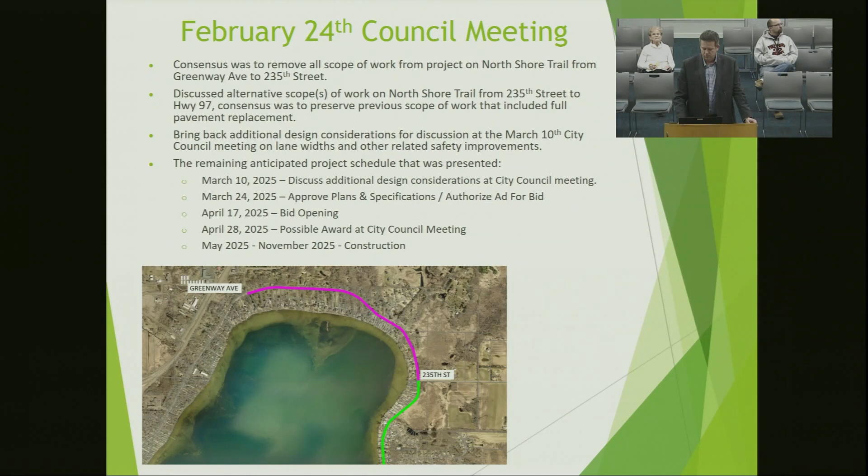So tonight's additional design considerations we'll talk about: lane width considerations, lane striping consideration, and solar-powered speed limit sign considerations. On reference guides that we look at when we are designing roadways or looking at safety features, here's a list of what we generally would look at. Some of them we would use depending on money source, some as a guide, and some are required depending on what you're doing.

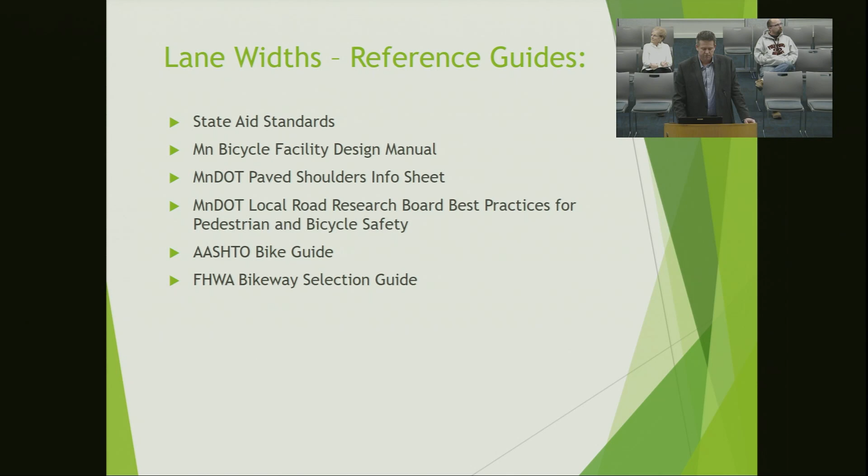Going through those reference standard summaries at a high level—there's pages that go into this, but this is really what we need to take from it.

North Shore Trail is a state aid route, but since we're not using state aid dollars, we don't have to conform to their requirements. However, we're still doing the same scope of work—we're reclaiming it.

Minimum lane width would have to be 10 feet, minimum shoulder width would be 2-foot gravel, and for bike facilities, they recommend following the Minnesota Bicycle Facility Design Manual.

If we were fully reconstructing it, like we plan to with the North Shore Drive portion from Highway 61 to Greenway, these are the minimum standards we'll have to meet on that design: a lane width of minimum 11 feet, minimum shoulder width of 6-foot gravel, and still following the same bicycle facility design manual.

The Minnesota Bicycle Facility Design Manual calls for a minimum 4-foot paved shoulder width, 6 feet preferred. Ideally, provide paved shoulders on both sides of the street.

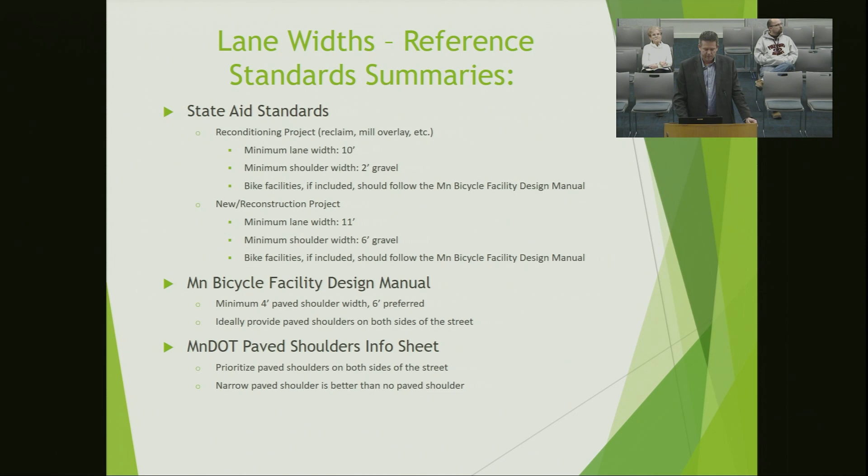MnDOT paved shoulder info sheets prioritize paved shoulders on both sides of the street—narrow paved shoulders are better than no paved shoulders. The MnDOT Local Road Research Board's best practices for pedestrian and bicycle safety recommend providing paved shoulders on both sides of two-way roads to discourage wrong-way riding.

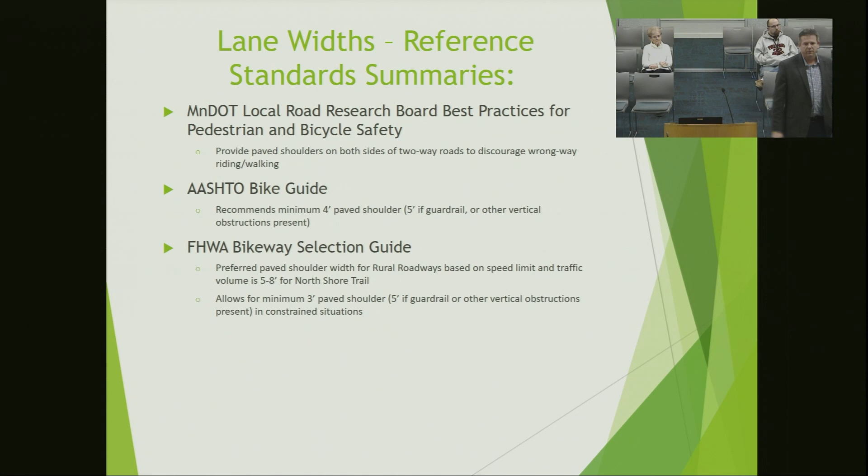The AASHTO Bike Guide recommends a minimum 4-foot paved shoulder, or 5 feet if there's a guardrail or vertical obstacle nearby. For instance, if there's an obstruction there, you're not going to be right up against it—you'll probably stay a foot off. That's what that reference means throughout the presentation.

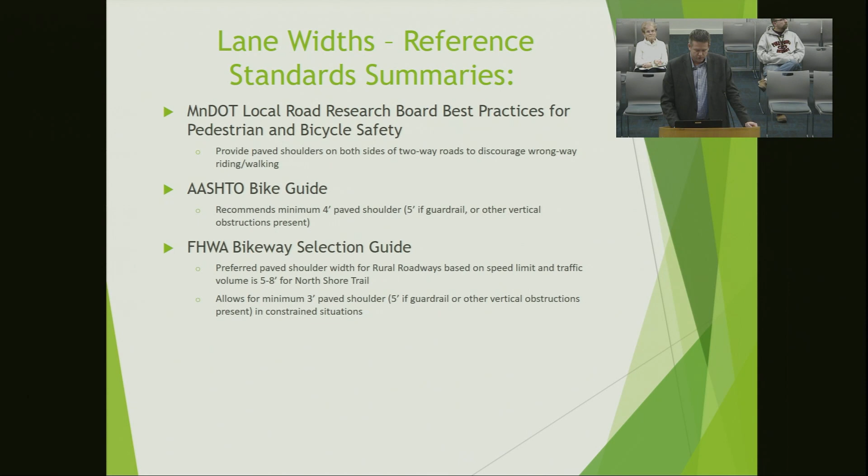The FHWA Bikeway Selection Guide recommends preferred paved shoulder width for rural roadways based on speed limit and traffic volume—5 to 8 feet for North Shore based on the traffic we have there. It allows for a minimum 3-foot paved shoulder, or 5 feet with a guardrail or other vertical obstruction present.

So some of the typical—quick question: what's the current width of the lanes out there? The current road is 30 feet wide at most on average.

There are some pinch points throughout this corridor. Even with new pavement, we're not going to get a full 30 feet in width in some areas where driveways were built close to the roadway. Once you go past the pizza place and the hill on the north side of the road, there's just nowhere to put the road any wider.

So right now it's 30 feet with 12-foot lanes—would that make 3-foot shoulders at best case scenario? All right, thank you.

Well, that leads into the slide—good lead-in. This is the existing section that's out there today: 12-foot striped lanes, 3-foot shoulders.

We just did some pros and cons for each typical section. Obviously there are other opinions that might add an additional pro or con, and that's certainly something we can bring up and discuss.

This proposed design matches the existing crown, meaning the center of the road is the high point and sheds water equally in both directions, at 2.5%, which is our city standard. For new pavement, it's important to have crown to get snow and ice off the road rather than sitting on the pavement. This matches the existing layout.

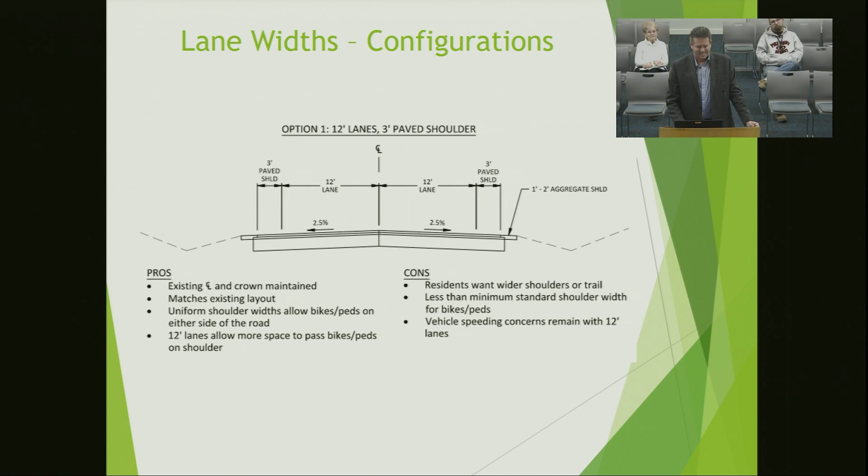Mr. Mayor, if I might interrupt—just so everyone's aware, a 12-foot lane is sort of the standard. About 90% of lanes striped on roadways are 12 feet. So keep that in context; that's the normal lane width.

On higher volume roads, your center turn lane would sometimes get wider than 12 feet. There are design considerations based on traffic and road type. Option 2 would restripe the road down to 11-foot lanes, providing a 4-foot shoulder.

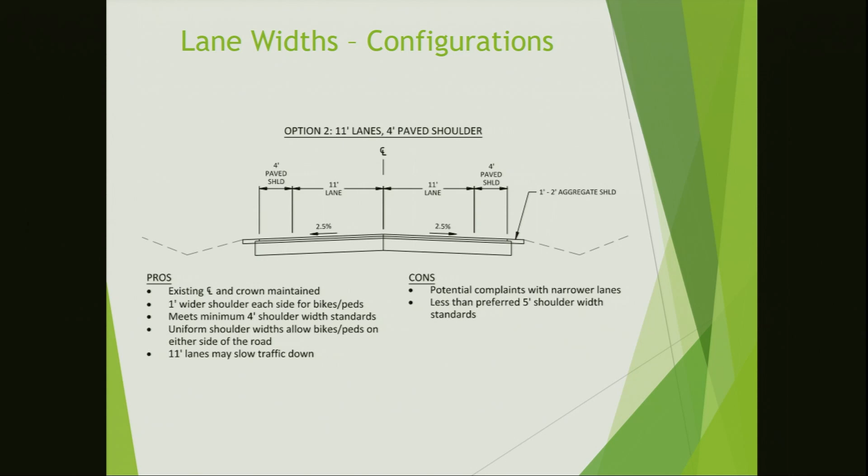Here we would still maintain the center crown. We'd gain 1 foot on each side of the shoulder, meeting minimum 4-foot shoulder width standards. Uniform shoulder width allows bikes and peds on either side of the road, and an 11-foot lane could potentially slow traffic down. Cons: potentially complaints with narrow lanes, less than the preferred 5-foot shoulder width.

So if you look at the 2 railings you guys got on the sides where you walk up and down from your dais there, that's about 4 feet. So if you stand in between, that's what it would feel like out on the road.

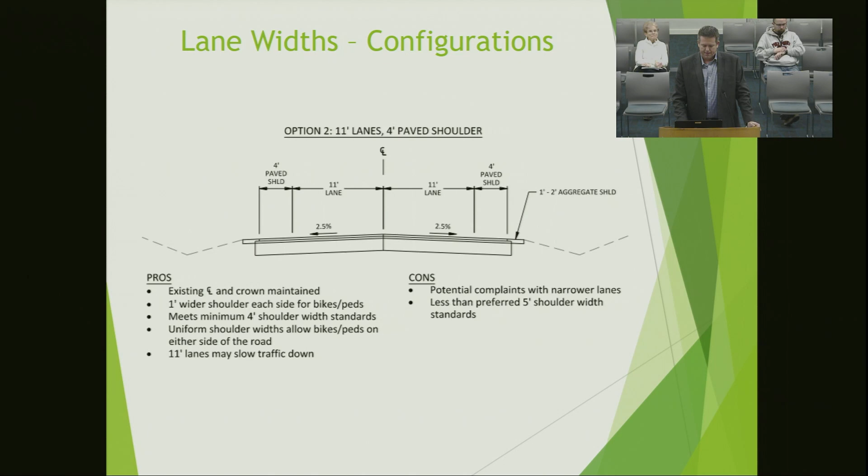Option 3: go down to a 10-foot lane, 5-foot paved shoulders. Existing crown here would stay the same, 2 foot wider on each side of the road. You get that traffic calming effect, and it meets the shoulder widths allowed for bikes and peds on either side. Potential complaints about how narrow this road is.

This would provide some challenges in some locations for garbage trucks, buses, and any larger delivery trucks that do drive down that corridor, to stay within that lane uniformly through wherever they're driving. And if you do have somebody close biking or running, if a car has to swerve 1 foot over to feel comfortable, you potentially are in oncoming traffic too. So the skinnier the lane gets, that's some of the things to think about from a driver's behavior.

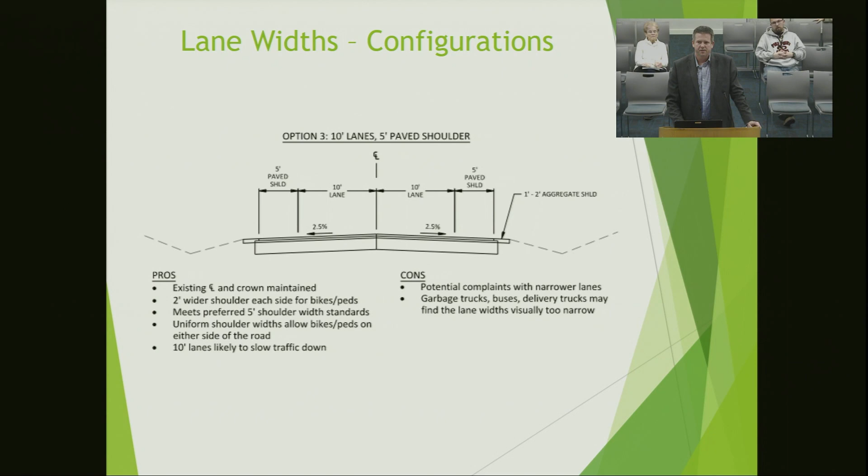Option 4: now we're looking at offsetting the crown of the road, which would require additional shaping, moving the material around with a grader after it's reclaimed in place to shift all that material over.

Some of it might be lost in their bid somewhere, but if you're actually just calculating the cost of the lineal foot of the project, this potentially could be around $70,000 for shifting it 1 foot, with the amount of material that if you calculated it out. But you're gonna be out there grading it anyways, so somebody might bid something a little different, and you don't actually see a price increase once you start playing around with the crown - it's just how they bid the project, because it's gonna be a lineal foot bid or a unit thing they'll have to do in the project regardless, to shape it and compact it before we pave it.

But here you shift the road 1 foot offset, you then have your 11-foot lanes, and you can obtain 3 foot on one side, 5 foot on another.

Notice though that one side of the road is gonna have a flatter crown. So over time, that side is probably going to start developing more pavement issues than the other side, because with the crown you're gonna get the water off the other side a lot better. And as the crown flattens out over time, that's where a lot of your roads start to degrade faster, and that crown starts sinking just over time.

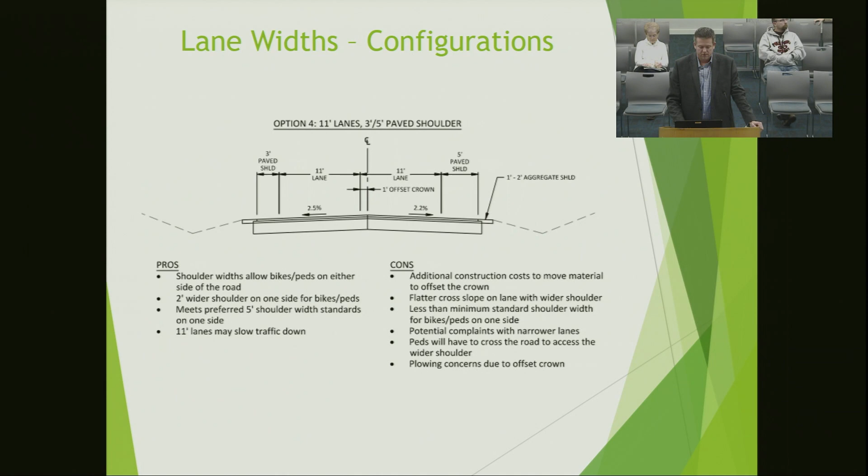Also looked at one roadway if you had a 2-foot offset and went down to a 2-foot paved shoulder on one side and 6 foot on the other, while maintaining the 11-foot lanes. Obviously you get that one side that exceeds the 5 feet.

You get a flatter slope, now you're less than 2%, and in terms of constructability of the work out there, unfortunately sometimes you're not just gonna even hit that 1.9, you'll be flatter than that. So that's why we set the city standard at 2.5 on new paved roads. So when you take into account the construction tolerance of a project, you might end up with a road that's just a little over 2% when it's all said and done in some spots.

If they're trying to match into existing curb, where lots of times we are, or they've got other obstacles to work around - utility boxes in the road or manholes and stuff like that - but with this, when you get a shoulder that wide out in this area, we know pretty well you might start inviting parking in that area. That's another consideration to think about when we do get that wide.

So there's just a lot of pros and cons that go into a lot of these options.

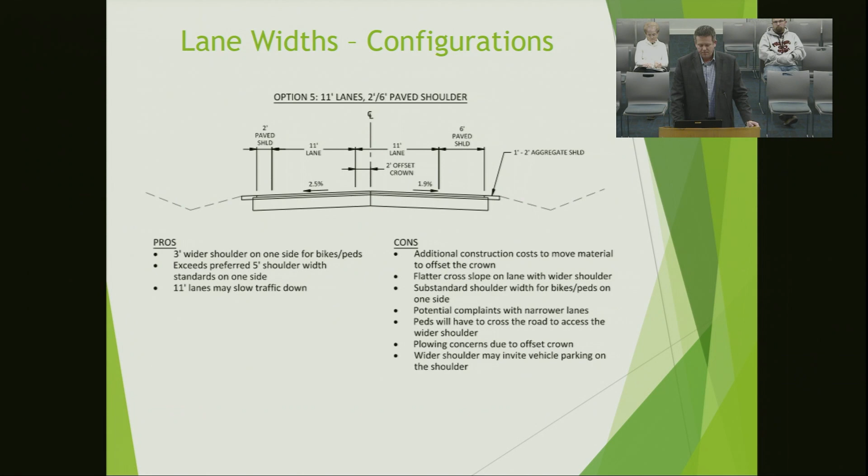I give that recommendation just knowing that's what experienced bikers and runners do. Bikers are gonna always bike on the side of the road with the traffic. Runners are always gonna run towards traffic. So even if you had a 3 foot or 2 foot shoulder on one side and a really wide shoulder on the other side, they're still gonna use that side regardless.

And I think that puts other people in more harm's way, especially if you got 2 trucks coming at each other and you had 2 foot here, and everything lines up in the perfect storm. You got the biker or the runner over here, you got that family here, and 2 trucks trying to get through. Something's gonna give in that situation.

That's why I look at this - even the experienced users are gonna be pretty sufficient with all the options, but it's that less experienced user I'm trying to think about and protect the most. Sometimes if you give that wider shoulder, they might think they're safe, but in actuality this is probably not a corridor for a non-experienced user. By providing that width over 4 feet, I think we're starting to invite larger groups to be sharing that side of the road together versus an individual or a couple out for a walk.

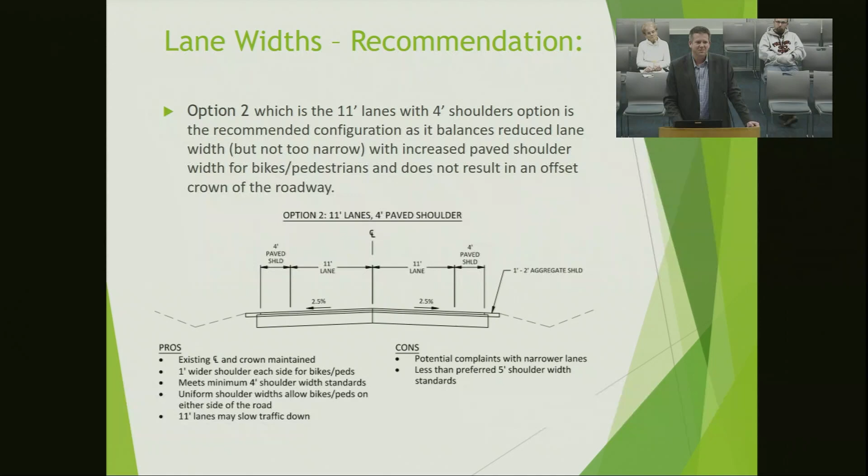I like it. I think just even for postal delivery and stuff like that, just to have some extra width for them folks to come out, I think is beneficial. I'd be curious to see how many of them folks have gotten their cars hit by cars out there on North Shore Trail, because I know that's one of their favorites.

They always say this is the worst area for delivering, North Shore Trail for them. And maybe I should put that snow plowing comment on the cons I had earlier - you're like, why would that bother snow plowing? Well, if you have the road offset and they're gonna hit that center line, they might not get enough of the driving lane because you've got so much more to push on that side, and probably gonna have to take 2 passes to do what they used to be able to do in 1.

Obviously the skinnier side, they're probably going to be able to easily get in 1 pass. So that was kind of some of that comment related to the snowplow situation, where I'm offsetting the road, leaving much wider pavement on one side with the same truck we're using on the other side of the road. But let me know now - keep discussing, or give me the nod to move on.

Any questions or comments for Ryan on this? No, as I read through this over the weekend, option 2 seemed to make the most sense to me.

Ryan, in my head I'm not clear, so I just want to be clear - are we talking about this 11-foot lanes and 4-foot shoulders on the entire road from 235th to Highway 97, or if we're not doing anything with the first part of the road? It's my understanding that that portion of the project has been removed.

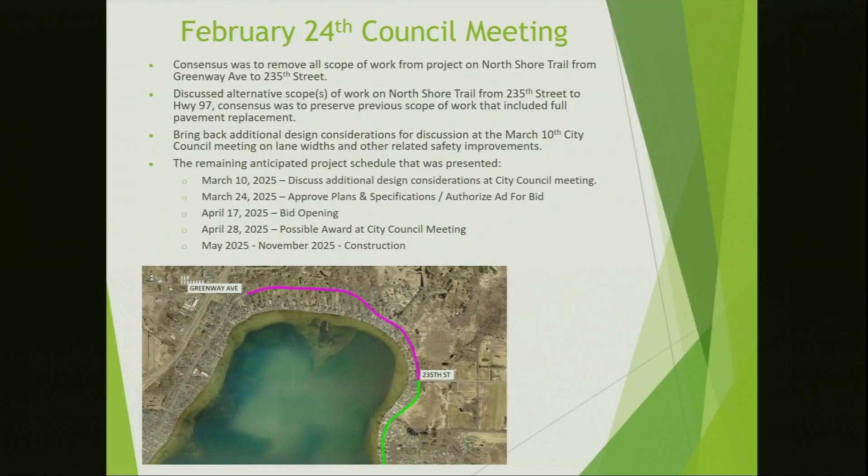So that's my point - my understanding was we were just gonna talk about it, and it wasn't removed at this point. I think we should go back and talk about it, look at the cost of that Greenway to 235th section and the actual feasibility, the safety - are we really sure we want to put a trail on that road? I mean, I think it's dangerous. I think there's not enough room. I think there's too many things we have to do to make it work. We can't even tie in the trail system with any of the other trails, because none of those neighborhoods are developed yet that are gonna tie the trail system in.

So I'm not sure if we should put that on hold or not, or should we just build the road as option 2, the whole way at this time? I've talked to a few citizens and none of them are really in favor of it. They're not making an issue out of not having it. At the meeting I attended, a few people talked about it, but it didn't seem like an overwhelming yes that we should do it. It seems like an awful lot of money for the city to pay for something we're probably not really ready for yet. Just my thoughts. Any additional thoughts on that?

I'd probably agree with Kevin on that. I think the cost of moving utilities, cutting trees, land acquisition and stuff like that, I don't think people really understand the totality of all that's involved in that from Greenway to 235th. At the last meeting, the idea was that it doesn't hurt to take a pause for 2 or 3 years on that stretch, knowing we're gonna be back in that area with a larger project on the North Shore Drive piece of it. So do we explore it, find out what those real hard costs are, what it would cost to take land - I agree there's a lot there that has to be done.

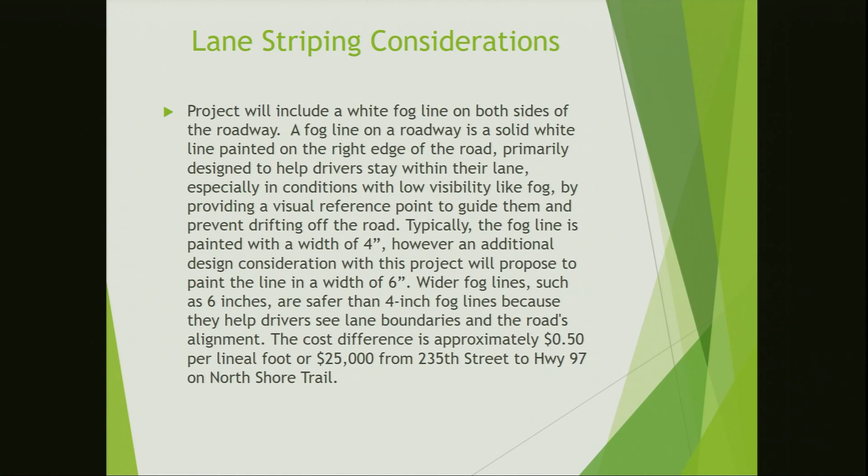All right, the second consideration was the lane striping. This type of road, obviously we'll have that fog line, that white fog line on the side of the road. Typically with our local roadways it's a 4-inch width. However, with the additional design considerations, we propose to paint it 6 inches, a little wider fog line, because the 6 inches is safer than the 4-inch, since it helps the driver see the lane boundaries and the road alignment, and it'll help provide some of that traffic calming as well.

Cost difference between the 4-inch and 6-inch is approximately 50 cents a linear foot, so that's about $25,000 from 235th to Highway 97. It would be painted epoxy, so ideally that would last 5 years, versus if we went with latex, you'd be back keeping up with it every year. Once you put epoxy down, typically you don't put epoxy on top of epoxy, then you come with that latex in the future, unless you have some really good areas still out there. But on original, new pavement, we typically stripe with epoxy.

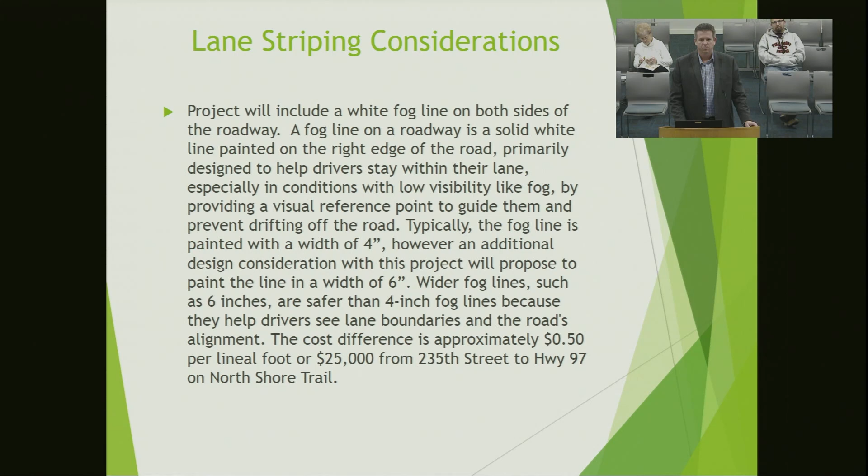This is what I'm referring to, that white line along the road, and we're recommending to go with a 6-inch solid white fog line.

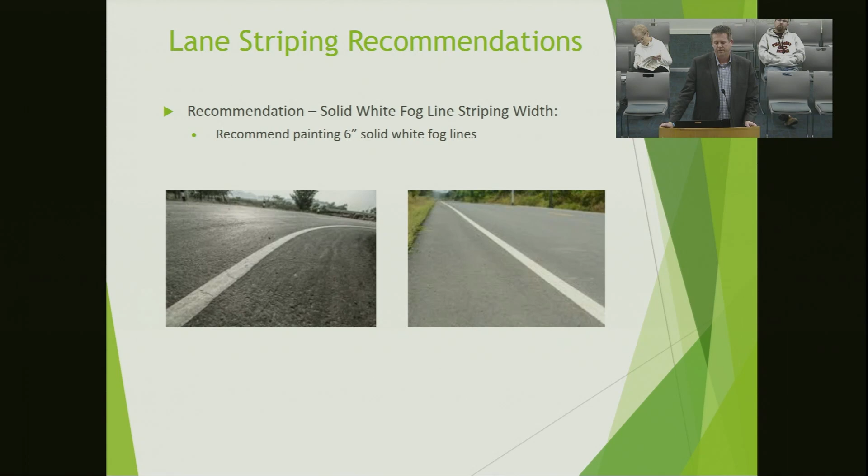The last design consideration is solar-powered speed limit signs. There is currently one out there right now, about 600 feet east of Greenway heading westbound. So if you were coming towards Greenway, you would see this sign and it'll flash at you what your speed is. I think these have been successful out there, and studies prove they're successful in driving behavior. They are approximately $12,000 to $15,000 with the proposed sign and the base breakaway sign.

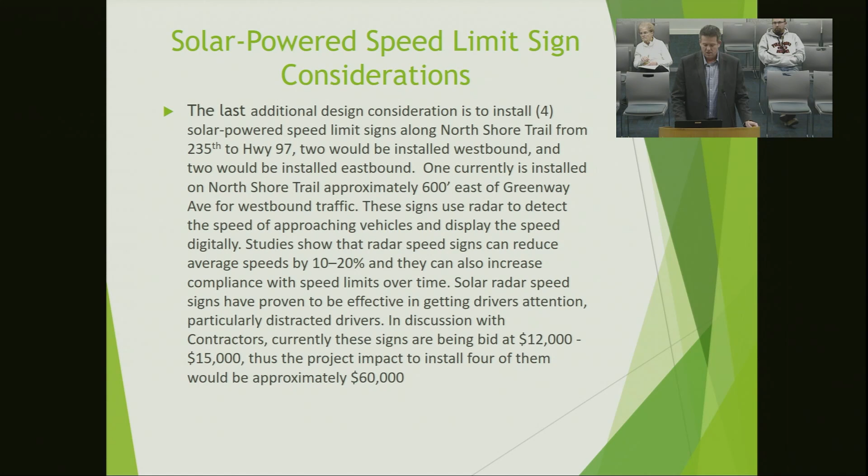My recommendation will be 4 of them, 2 eastbound and 2 westbound. We'd work with Public Works on final locations, just to make sure we're not getting in the way of anything from a snow plowing situation or other reasons. So that would be about $60,000 added to the project. And here's what they look like.

So the recommendation would be to install 4 more of those between 235th and Highway 97, 2 westbound and 2 eastbound. The one on the left is the one that's out there today. The one on the right was actually just installed over in Scandia.

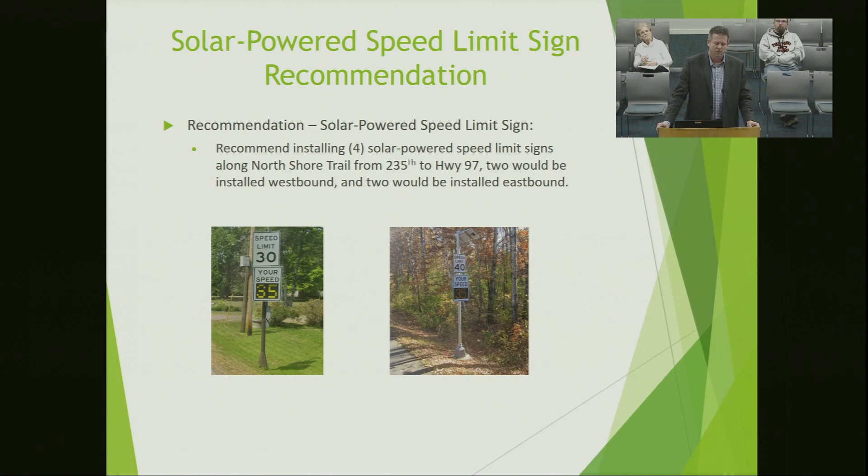So now in conclusion, we can make some motions or have additional discussion, and I can go back to any slides you want. Scope of work, lane width consideration, lane striping consideration, solar power, speed limit sign consideration - these are what we're looking for on final direction tonight.

Yeah, I mean, it makes a lot of sense to have that 6-inch line for the reasons you laid out. And as far as the solar-powered speed limit signs, I would be in favor of that. Some people may ignore them anyway, but I think it's just another visual reminder that people need to slow down, so I think it'd be worth the investment.

Can we install cameras on them and issue tickets? There's a lot of change with that going on in some places right now. That'll be a legal question.

So in some of the feedback from the neighbors or people that attended, the concern was the speed. Right now you have that North Shore Trail road out there that's rough, and it slows people down automatically - the whole thing's a speed bump, about an 8-mile speed bump. Having that nice pavement is going to increase the speeds there. So I think having these solar powered speed limit signs would help slow down at least some of the people.

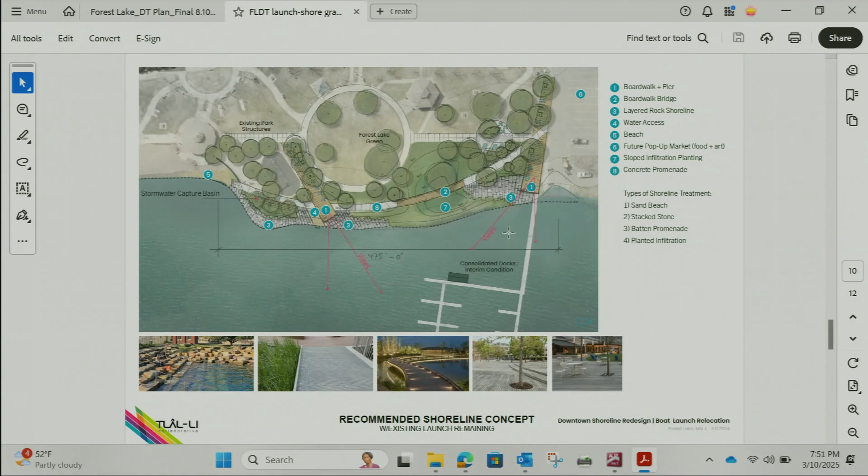So up on this screen, this is the zoomed-in version of the concept that came about last year, correct? Yeah. I believe it's on the Capital—I can't remember which year, you think it's 26? I do think that we had it in Capital for 26. So I'll scroll down, that was just a zoom in on the budget—this is what the estimated budget was.

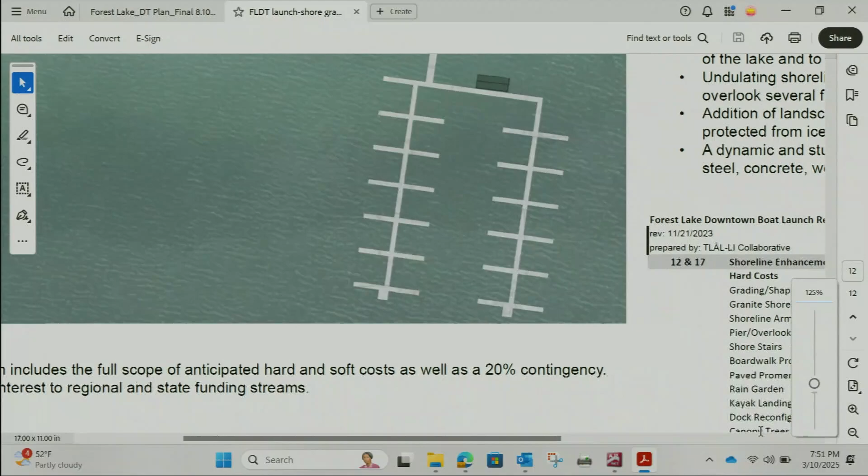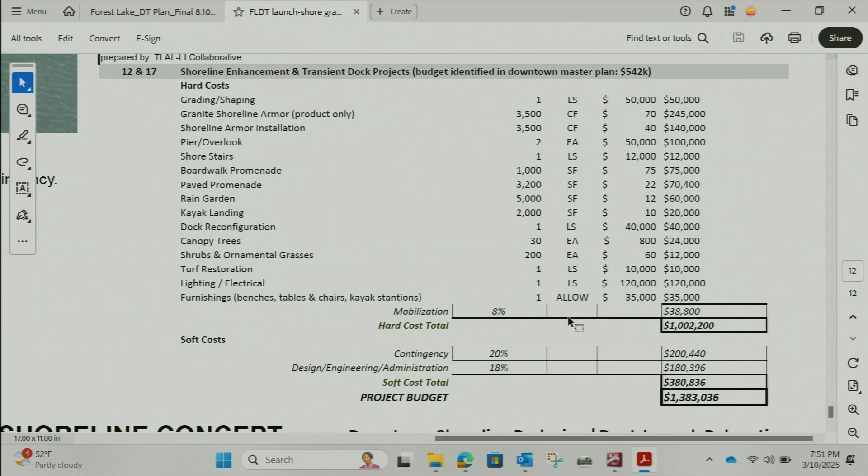The tricky part is, you can't really tell if you're going to use part of that existing trail. If you're not, it kind of shows maybe in this area that might get used, but then it curves up. So the concept was more of an artistic drawing versus a construction plan, so it's hard to tell exactly.

If that paver trail's going to be salvaged or it's all going to get torn out anyway—I don't know, is it all going to go? Okay, so it's all going to go at that point. Yeah, because I think over on the left-hand side you've got all those major boulders or rocks coming in there, and that would definitely overlap where the current trail is.

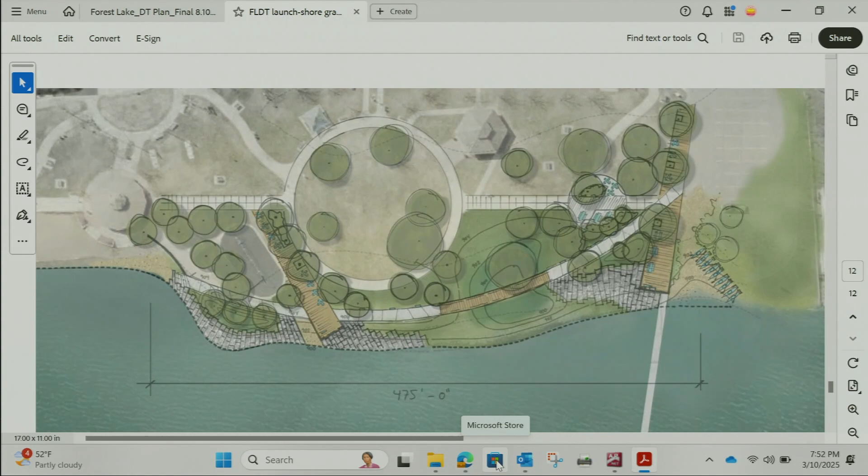So was the idea in 26, if this is on the CIP, to fund this through levy dollars? I don't know how that was plugged in there. I don't remember either, and I unfortunately locked myself out of my computer right before the meeting. We'd have to double check, but something made me think that we did put this in for 26 for the stabilization of the shoreline. Almost 1.4 million, we did estimate the shoreline stabilization was about 800,000 of that, but that is with the boulder design.

As the council may remember, some direction was provided to go and talk with the DNR about that shoreline design. Since the damage occurred in the spring, I've chatted with our water coordinator at the DNR about looking at almost like a seawall design, some sort of pile driving in. They're not favorable to that design. That being said, I've asked the question, is there the opportunity to build a wall and backfill with sand, plant material, vegetation, so you have that natural shoreline appearance? I didn't get a yes, but I got that's a different conversation. I think between now and as our conversations keep going, there are opportunities in the near future to find and settle on a design that works for the city, works for the community, works for the DNR.

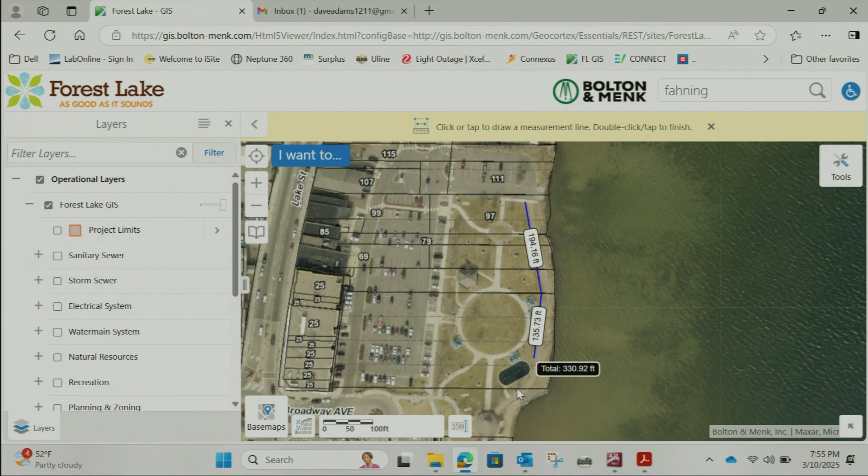Would the idea, Dave, on redoing the trail be: we'd remove the rock we have there, push and flatten it out, and then bring the rock back in place? It would be resetting - salvaging all the rocks, picking them out and setting them on shore. They'd regrade the entire shoreline, lay fabric down, and then reset all the rocks back in how they should be, about 4 feet farther down and out. So they'd regrade it as the original grading plan was, bring it back to that same shoreline.

So I apologize if I missed that - I saw the difference on the trail, but what's the total price to do that, plus? The base bid is $119,000. It's on page... is it on there? 106. $119,965.

And that is including the trail? That would do everything minus the trail - the trail would be the allowance or the add-on. It's just bid at a square footage, so as much as they would take, that's what you'd pay per square foot. For reference, 330 to 350 would get you almost back to that swing set. There's a perforated drain tile that comes out right here in the sunk area, and then that's when it all starts getting a little wonky.

The salvaging - if you did go with the blacktop trail, they would salvage all the personalized ones. It's pretty thick between here and the public dock, and then it gets pretty sporadic for the rest of it. There's some on the edges, but that would be part of the deal, that they'd make sure they salvage. We could find a different place in the park to replace them, maybe the new Veterans Memorial when that goes up, to have a place to add them into. So if we did go with the blacktop option, at least those would be salvaged and figured out where to use somewhere else in the park.